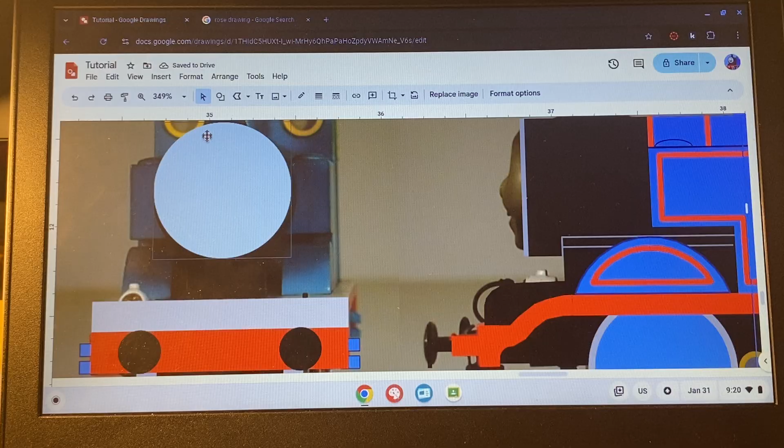Then just make sure you got it right and it looks good. Then you center it and align it in the center. And then you also make the smoke box support. So basically what you do is start off with the smoke box, because that's usually where the front is.

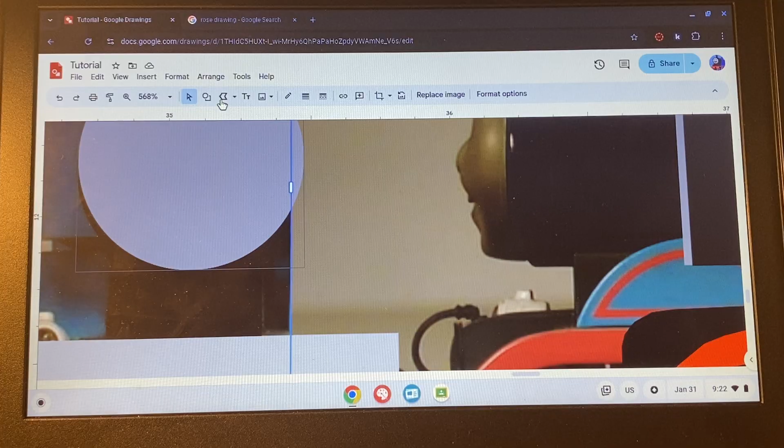So what I'm gonna do is grab a polyline and just kind of shape your way to form it like this.

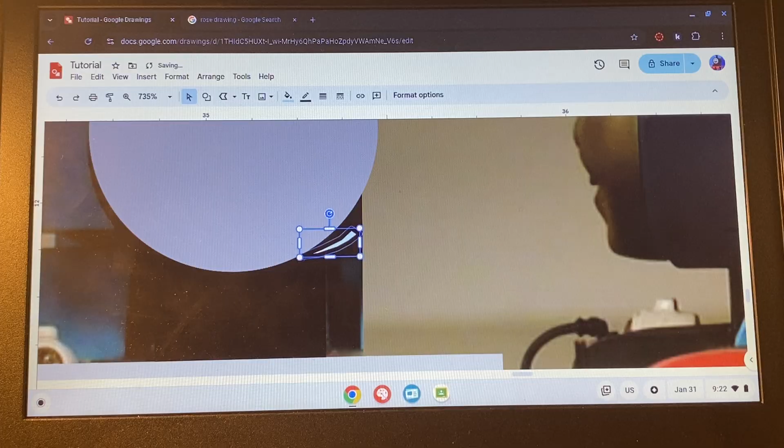Of course, it can be pretty hard to do so. And then, from there, you start adjusting it to exactly like that. It's very time consuming, but if you want to go for attention to detail, then sure, you can do that.

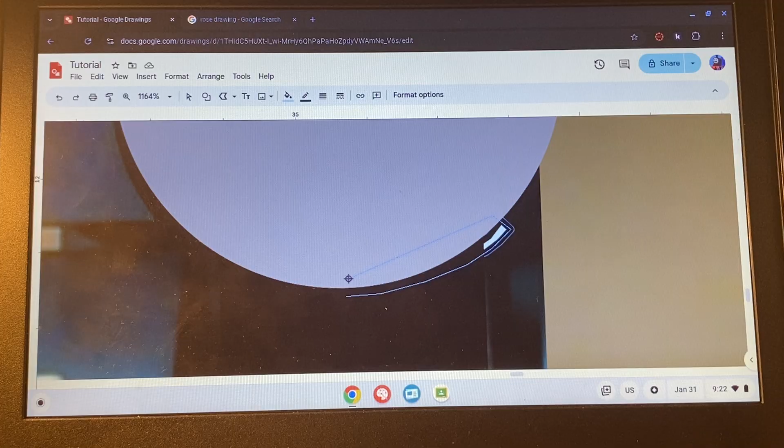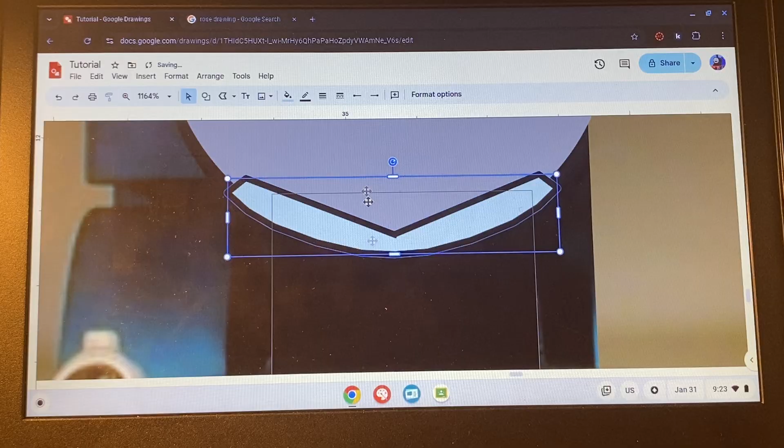Then I align it, I shape it, and then add the lining, like just like that. Then I double check if it's good enough, and it's close enough. Of course, you could also not include this one, but for the sake of this tutorial, I'm gonna keep it.

Now, oh yeah, one thing - for the funnel, the easiest trick is that I basically got a side view, grab the funnel itself, and just bring it to the front view and line it up centrally.

Now this is optional, but like, this is based on the curve. But if you want to move it out, just hide the fact, then you can do that, or just not include it entirely. But I'm just gonna keep it for now.

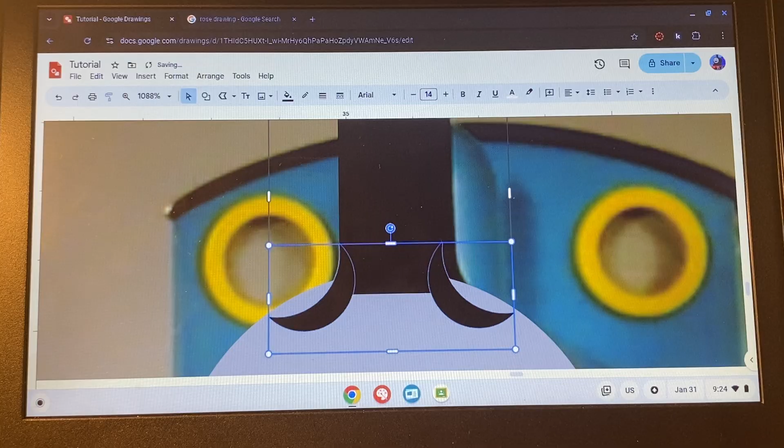Or you could just move it down. Make sure you put it behind it.

Now see here that this face and smoke box are the same circumference or the same height. That's why I only have this face here and not the whole smoke box. But if you want to make the smoke box visible, you must shrink the face a bit.

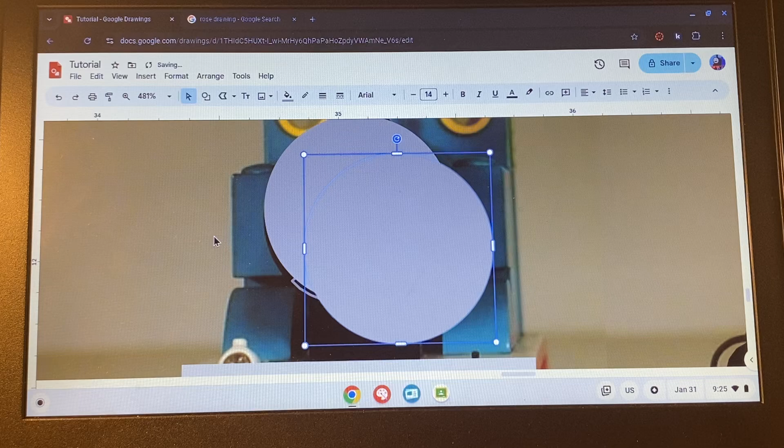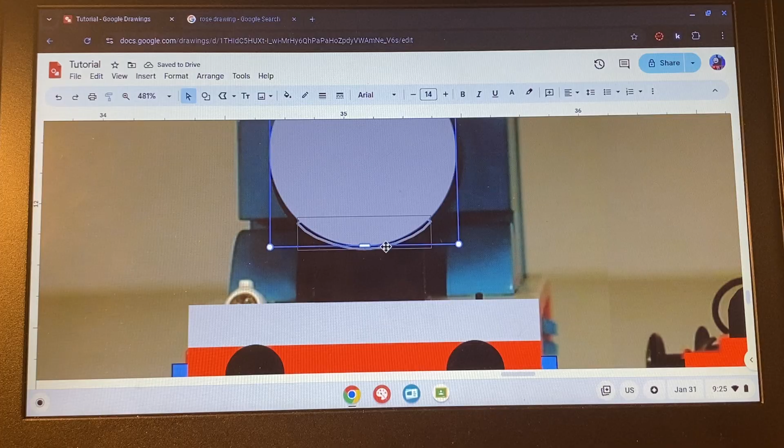And then like this. It'd be something like this. For the sake of it, I'm just gonna keep it as is. Make sure everything is aligned in center.

Okay, now for the body itself. This is gonna be a tricky part because usually it's not aligned properly, like how a normal orthographic diagram goes, because of a thing called perspective warp. Basically, when not everything is aligned how it should be.

Like this tank here is not aligned with the cap itself. You see there's some dash here and here, misaligned, which means not center. And it should be. But here's a trick that I do - I will shape it. Oh, and then I forgot the arch thing here. I forgot the arch here.

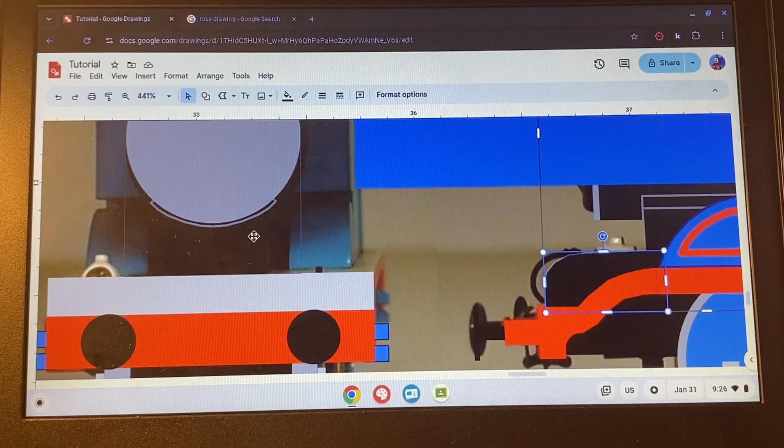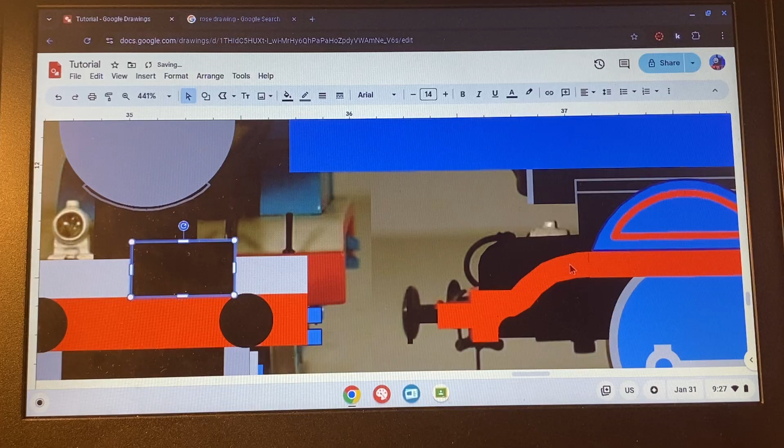Okay, this may take a while. There we go. Now must give the height to it. Then add the lining. And now we do this. And then now it's starting to take shape. Make sure there's a line like in center.

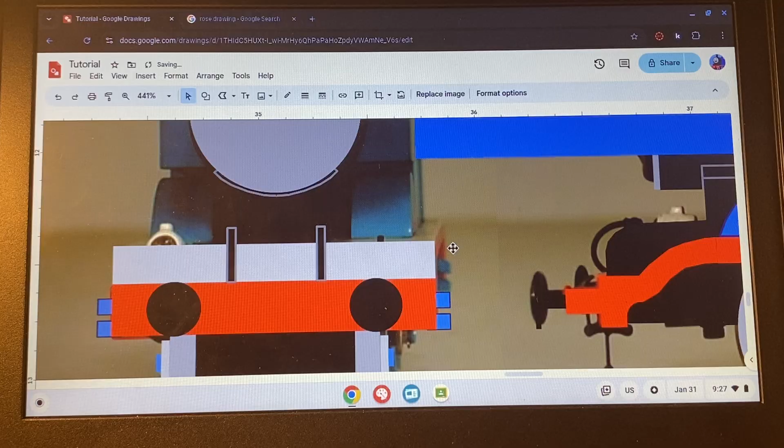Alright, now for the tank. I think the trick here is that I basically use this reference photo. I size it and then line it up with the side tank. My bad.

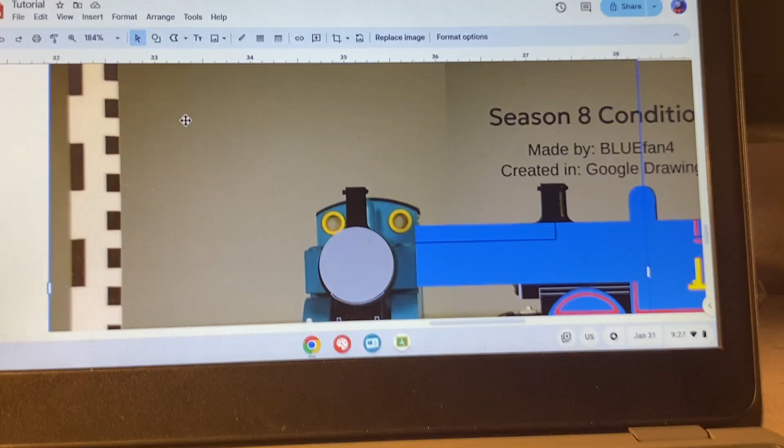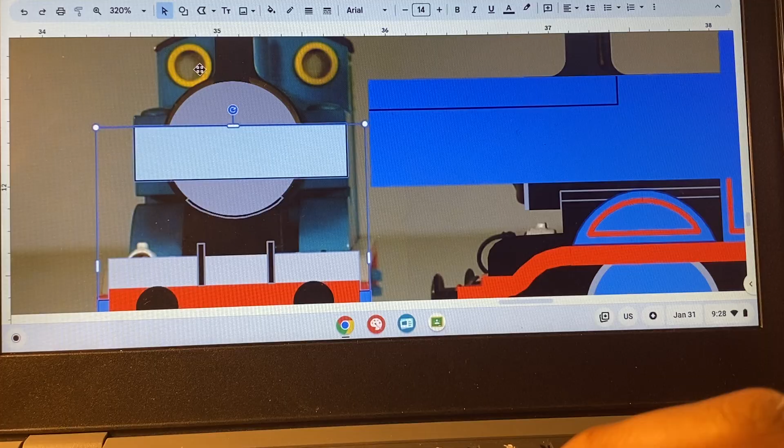Grab a rectangle, then move it out here. And then I center it, checking, and like that.

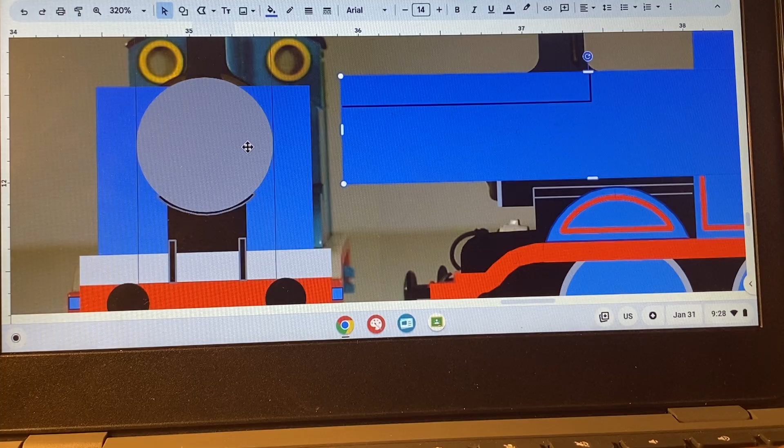Now this is how I would do it. And one from there, I did this trick where - here's a trick that I do - you probably make an L shape like this, and then this is for the splasher.

See how it aligns perfectly? So therefore I use that, line it up, and this will create a perspective that there's a splasher or wheel arches there.

And then I use a line to create both like the edge of the siding, on both sides. And like that. Then I move it back.

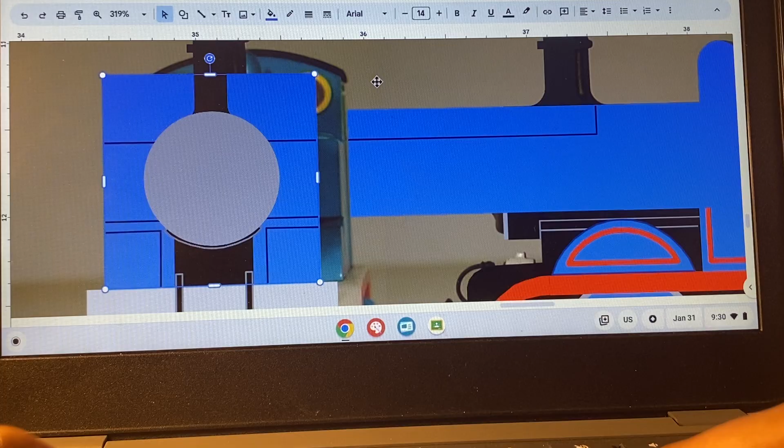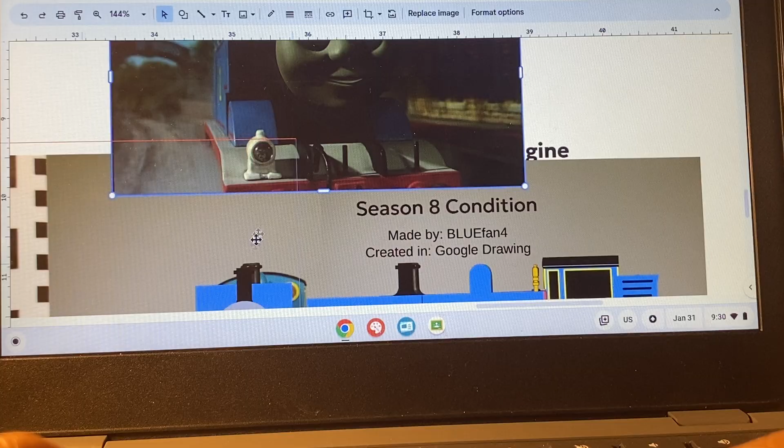And I'll get you the cap later. Now, let's see if the width of it is incorrect - this would be a good chance that I use a reference photo. Let's say this one for example, which I got from the beginning, and just double check if it looks right. It may not be accurate, but it should be close enough.

It depends on how you want yours to look like. See here, this one is a bit shorter than this one, but it should be okay with how far this is from the footplate to the body here. So close enough, I'll count it.

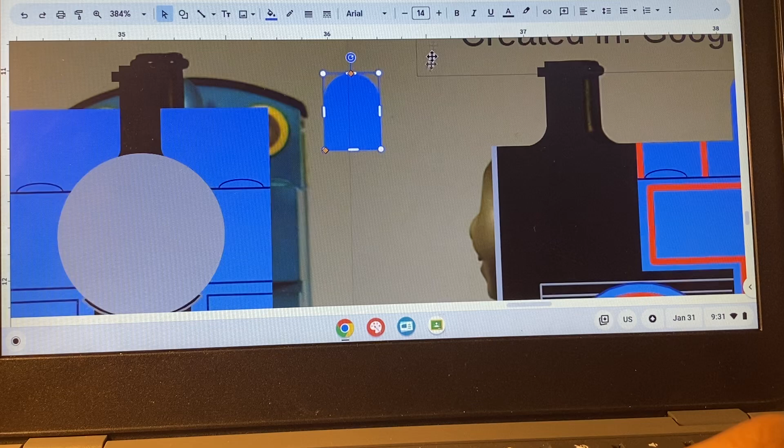Other than that, move these, move the tank, and then grab the water cap. Center it, and then grab the dome. And then from there, I use this line to align it, and then stretch it so it looks like it's not floating.

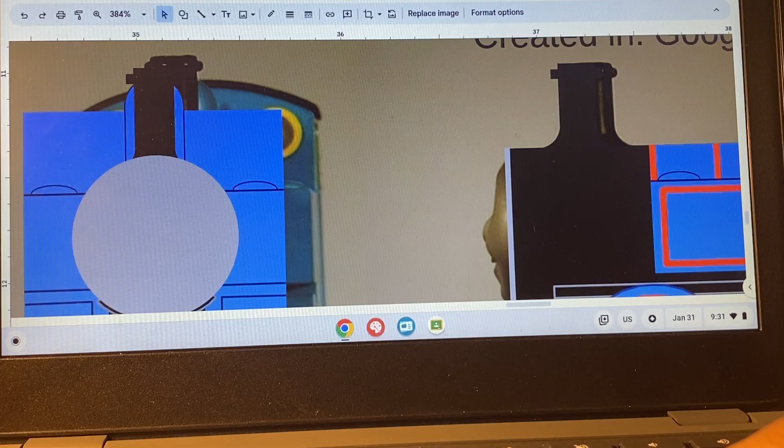Now normally I would do the whistle, but since it's behind the dome, and I think you can't really see it that well, like here - I think it's not necessary to include them.

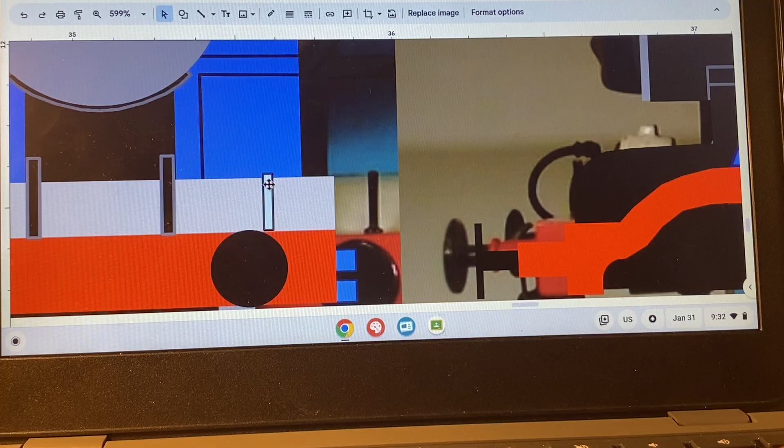But then again, I'll come back to it later. Don't forget to include this one. Now finally for the cab roof.

So what I do is grab the cab roof from the side view, and then you need to see this later. Now I need to size the whole thing to the body width. Notice how it's shorter, so we need to start aligning.

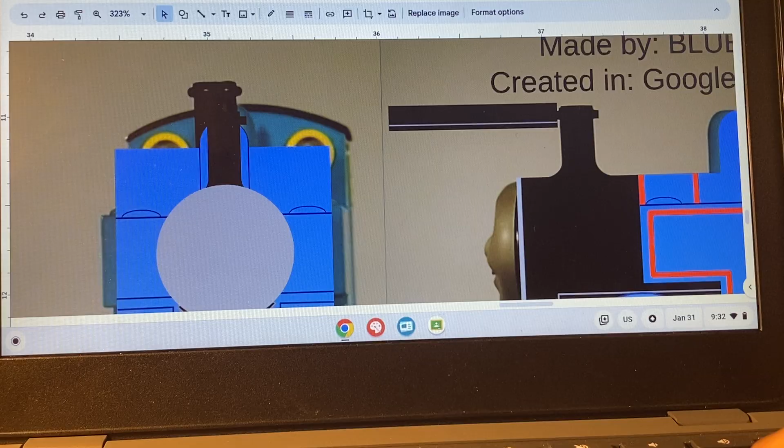Looks about right. And then you double check if everything lines up. So this way, I grab this one, I check if it's aligned, close enough. I'll consider it, and then you start shaping.

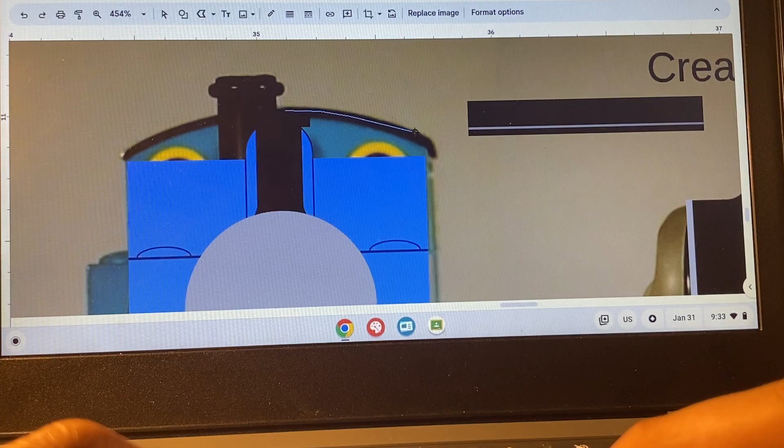Now for the roof, I mostly use polyline, well actually all the time. So what I do is go to the center of the roof and just trace it from there, and then I change the thickness to match the size.

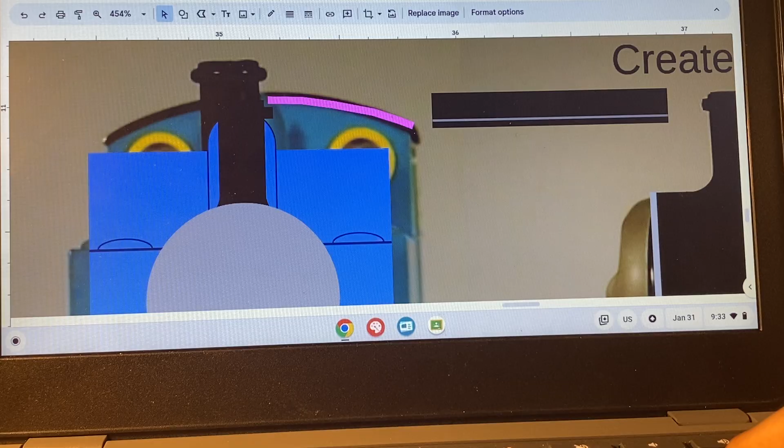Of course it may not be complete or exactly right, because it may look different, but it should be close enough that it should be fine. Like I mentioned earlier, it's low poly, so you can go as detailed as you want, or as easy as it is.

So I'm making mine a bit easy. Now I align the roof to center, just making sure it's for the roof. Usually I go by the roof, but that depends on how it was made and how it would look; it may look entirely different. Like here, this one is a bit shorter than this one, but it's okay.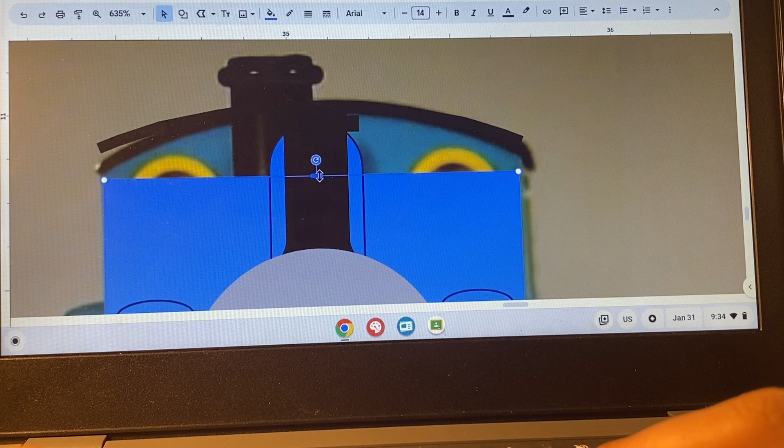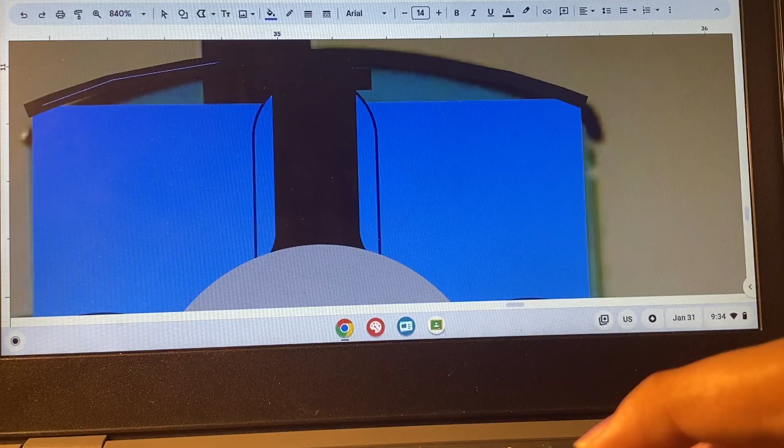Now for the cab, what you do is grab the whole thing and stretch it to where it will be blocked by the polyline and shape the roof. Here's a trick I made for this.

It may look funky as it is, but once you bring it backward and group it with the whole thing, that's when everything aligns, despite looking very weird.

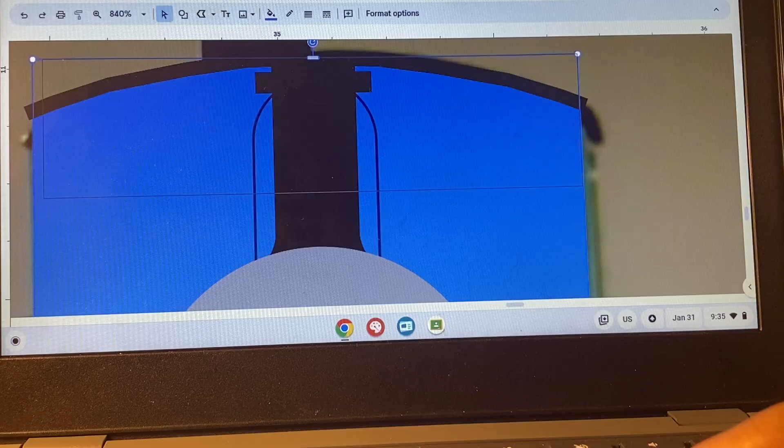Now for the cab window. This one is circular, so you can use a sphere or a circle. I'm gonna say circle, not sphere.

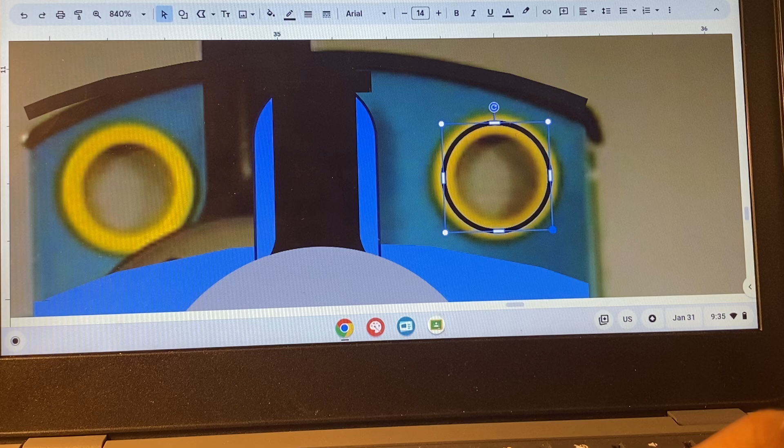And then just do some adjusting and make sure it lines up, making sure the gray line is inside. Then using the line thickness, and voila. Center it, and that should be it for the circle for the cab.

Now I just want to mention this for any other time. For the window, you can make any shape you want, but you need the right tool. So let's say you want to make a square one — click this square tool. If you want to make a curved one, use a polyline.

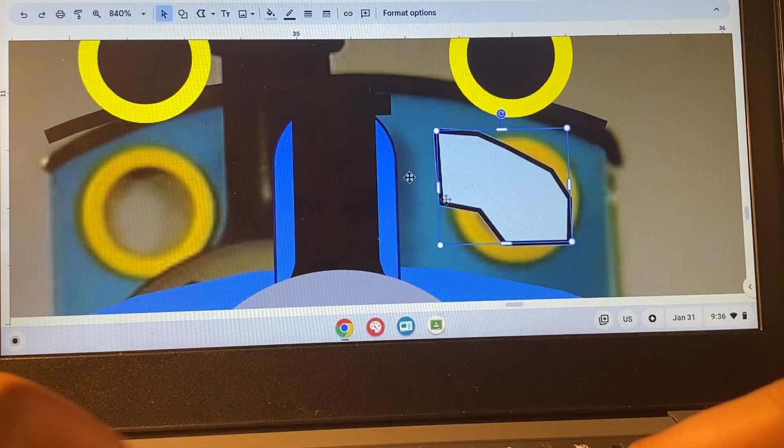So it would definitely look something like this. It could be any shape you want. Right, once you had that before, you're actually near completion, but you need to do a few more steps before you're done. So earlier you had this side view, and you need that to double check the size.

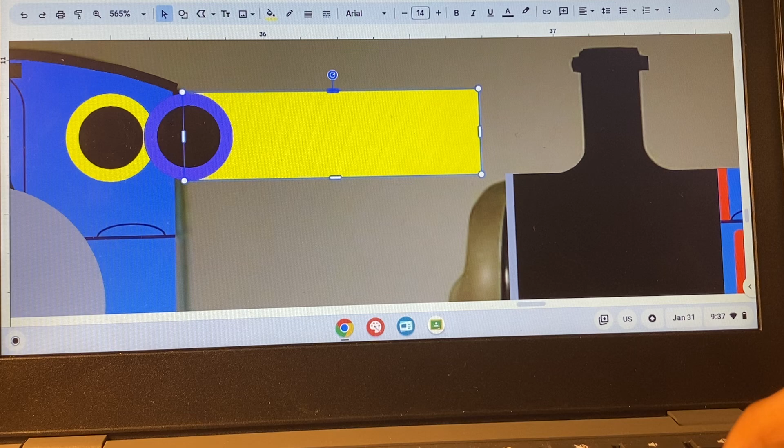And yeah, this whole thing is almost complete. The last thing I mentioned that you need to do is the lamp irons, these things. So what I'm gonna do is reshape the whole thing by the foot plate, and from there you can start making the lamp iron.

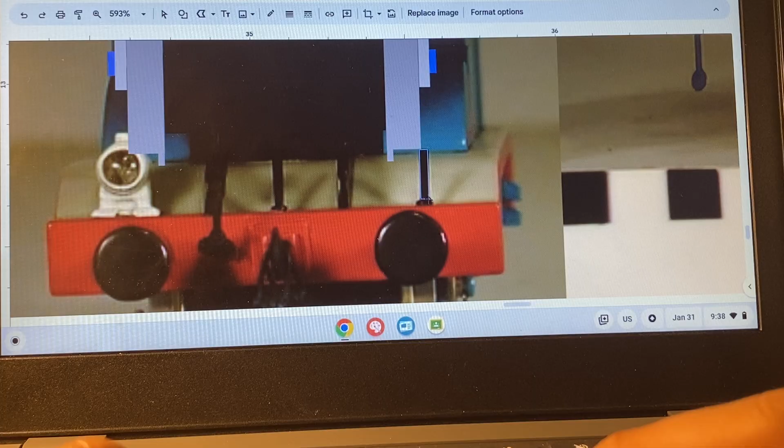Normally I will make the lamp itself, but I feel like I don't want to do that because I want to make this orthographic diagram, as I'm recording this on the last day of January, more like a base for when you're making this.

So all you do is group them, paint it black, and align it.

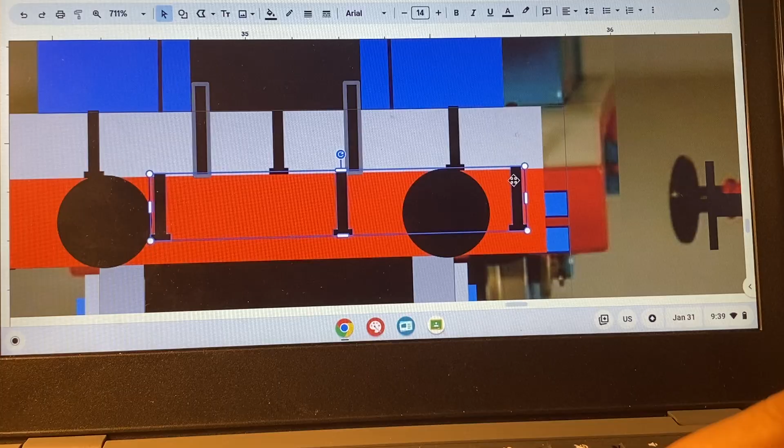Oh yeah, you should get them for the front view too. Oh no, I mean side view is side view. Make sure to use this one.

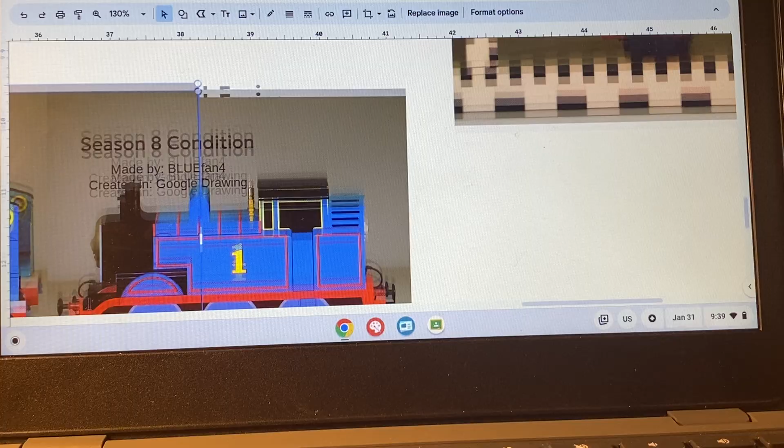And yeah, that's basically everything about this one — the whole process of how to make an orthographic diagram in Google Drawing, well, for Thomas' friend. It's also optional if you want to make a back view of it, like this one.

Because of how different it looks — for example, this window here is higher than this one. It's up to you if you want to do that, but for the sake of it, I'm just gonna keep it like this. And that's basically everything.

Actually, let me change my mind. If you want to include the back view for more detail, I'll do it in a very easy way. So what I do is grab the cab and the window.

Okay, then you need to align it. The trick here is if you want to hide the window...

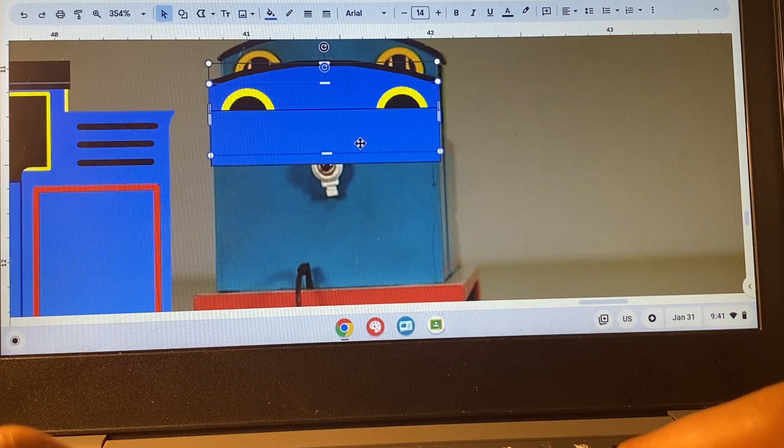...to make it look like it's covered up, I use another rectangle and just make a circle right here. Make a new rectangle here to cover it up, then I size this one.

And from here, I basically trace everything as such. Then I align the windows to the center, then I copy paste it and add it here.